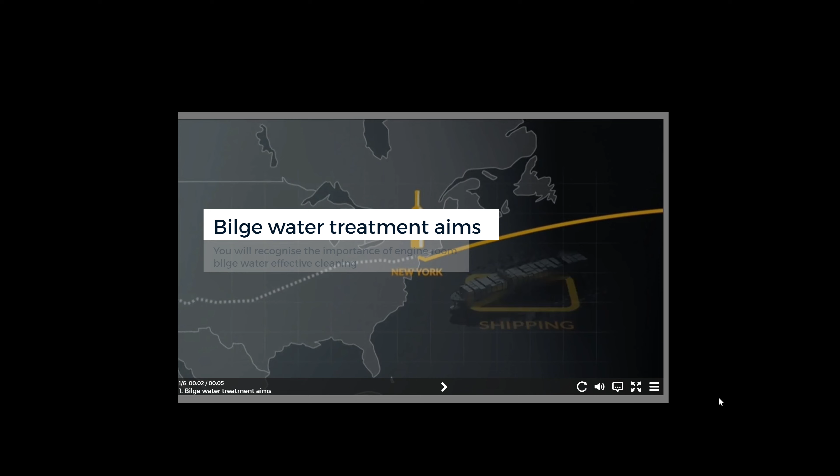Different modes of transport have a different impact on the environment. Carbon distance reflects the difference in climate impact among different modes of transport. For example, the wine industry recently found that a bottle of French wine transported by sea and served in a New York restaurant will have a lower carbon transportation footprint than a bottle of Californian wine served in that restaurant. Transporting goods by sea has a lower environmental impact than road, rail, or air transport.

As you've just noticed, shipping is the most carbon-efficient mode of transportation. Nevertheless, the environmental impact of shipping is not limited to greenhouse gases only. It also includes acoustic and oil pollution.

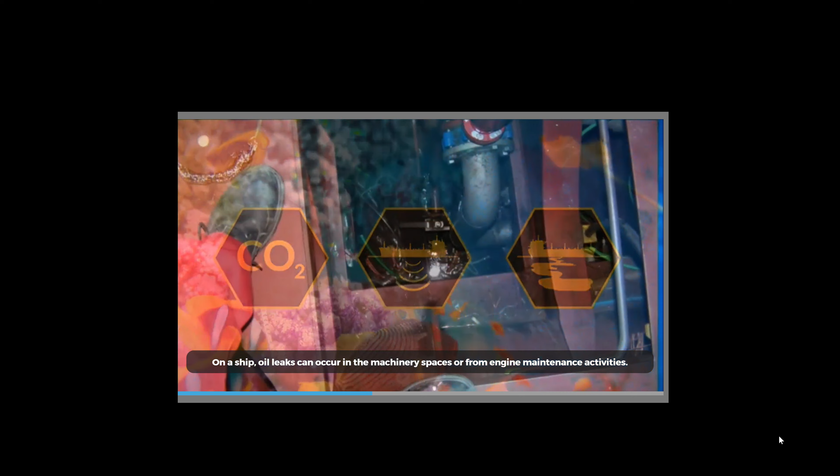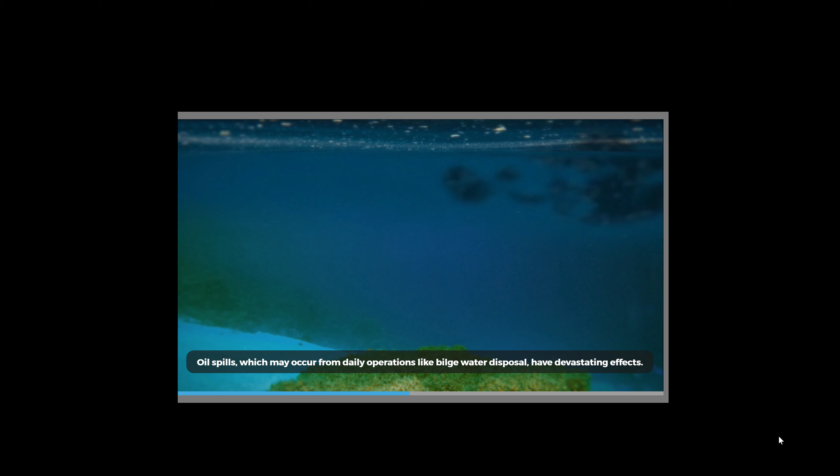On a ship, oil leaks can occur in the machinery spaces or from engine maintenance activities. Oil spills, which may occur from daily operations like bilge water disposal, have devastating effects. Oil and byproducts from the biological breakdown of oils can harm fish and wildlife and pose threats to human health if ingested.

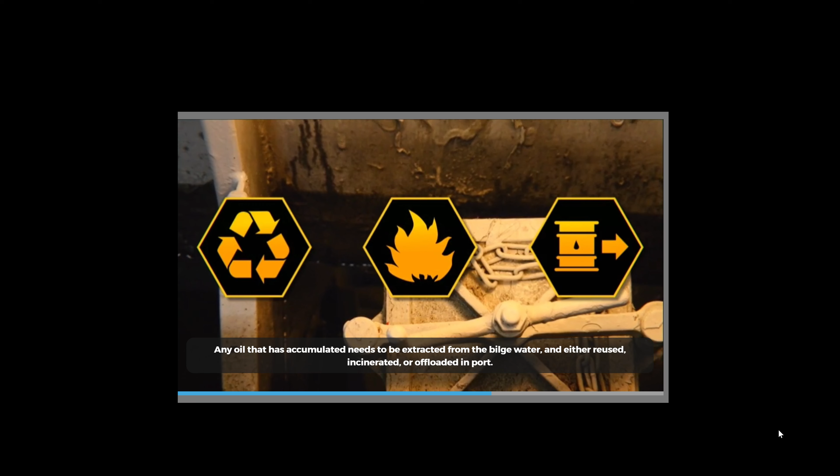Any oil that has accumulated needs to be extracted from the bilge water and either reused, incinerated, or offloaded in port. If the bilge water separator is faulty or is deliberately bypassed, untreated oily bilge water could be discharged directly into the ocean, where it can damage marine life. This will also cause ship operators to be given heavy fines and the crew can be sent to prison.

The size and global nature of the shipping industry, over 90% of all trade between countries is carried by ships, makes it important for the industry to continuously work to reduce its environmental impact. Cleaner oceans are a major environmental concern for the shipping industry.

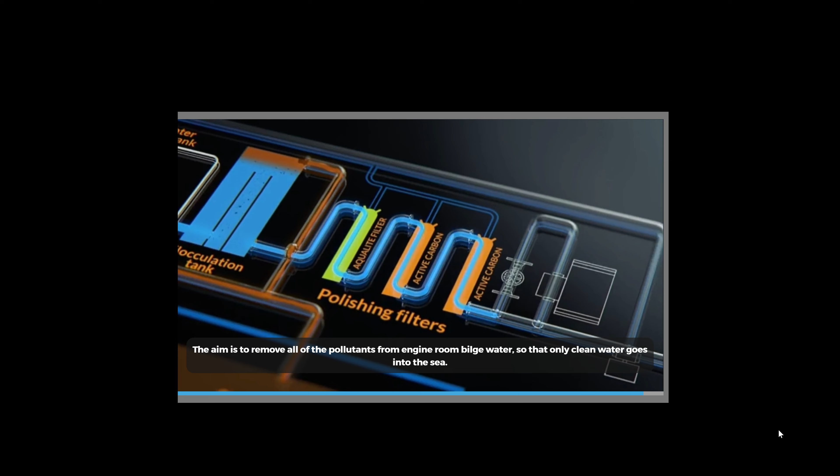The aim is to remove all of the pollutants from engine room bilge water, so that only clean water goes into the sea.

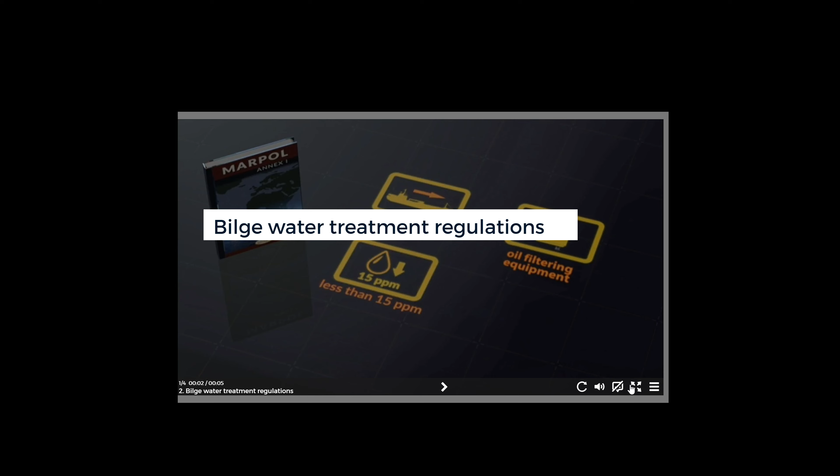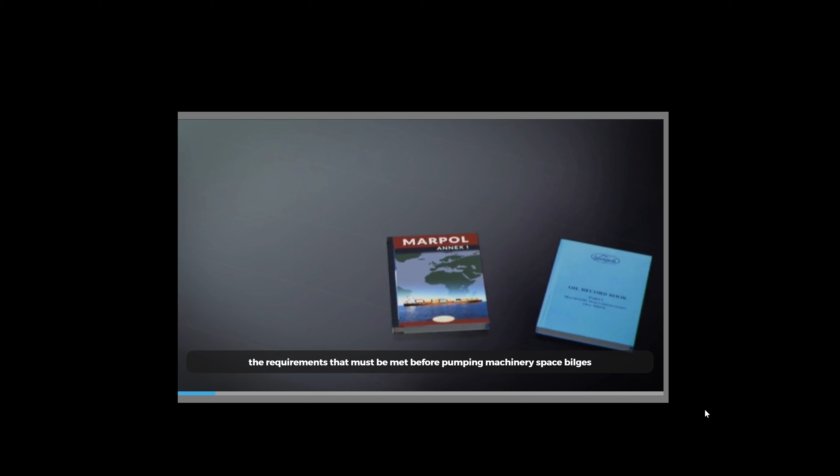To start with bilge water management, you need to know two things: the requirements that must be met before pumping machinery space bilges, and the records that must be completed for machinery space bilge discharges.

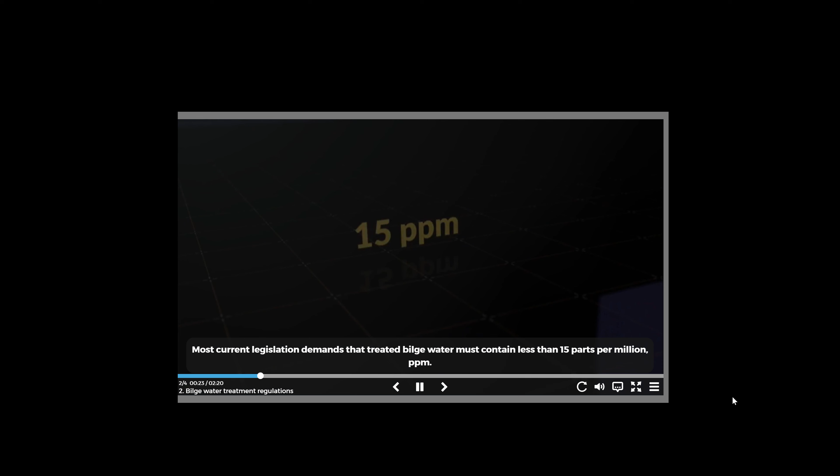Most current legislation demands that treated bilge water must contain less than 15 parts per million (ppm). To put that into context, if we had a typical 210-litre drum, 3.15 millilitres would be 15 ppm. That's about one medicine dropper or half a teaspoon of oil mixed in with a drum full of water. Depending on your point of view, that's either a lot or not very much. But remember, what we would like is zero discharge. When this rule first came in, 15 ppm was about the limit for what we could reasonably get down to, and what we could measure with reasonable accuracy.

Nowadays, however, most bilge separator manufacturers are working towards 5 ppm, which is already a requirement in some localized areas of the world.

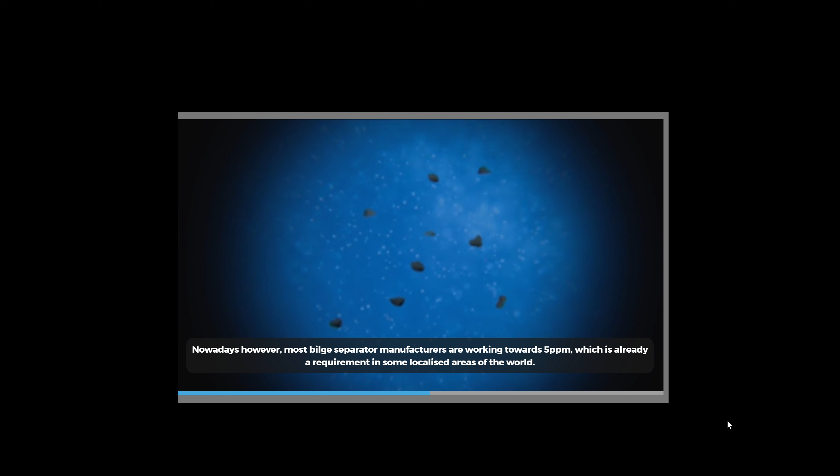First of all, we need to be clear that MARPOL regulations are written to try and avoid anyone cheating. So we must not knowingly put things like cargo washings or cargo pump room bilges into the engine room bilges and then say we are discharging engine room bilge water. That would be illegal.

Annex 1 of MARPOL says that for a vessel above 400 GRT, machinery space discharge outside a special area is allowed when the ship is proceeding en route. The oily mixture is processed through oil filtering equipment, meeting the requirements contained in Annex 1. The oil content of the effluent without dilution does not exceed 15 parts per million. The oily mixture does not originate from cargo pump room bilges on oil tankers. And the oily mixture, in case of oil tankers, is not mixed with oil cargo residues.

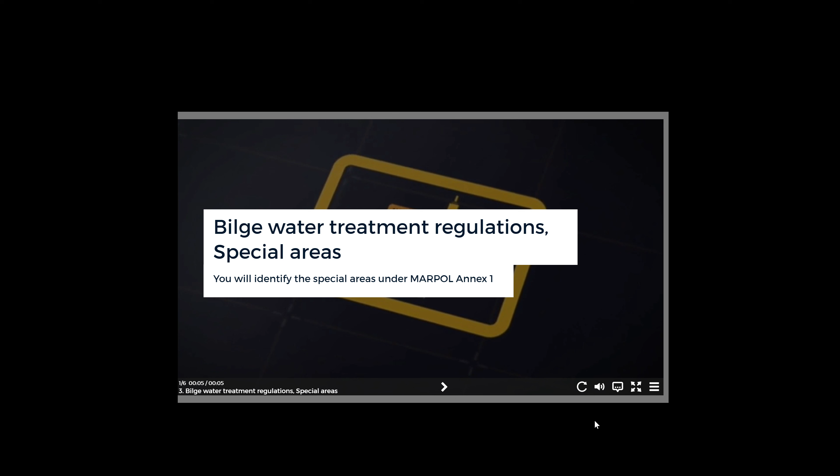We will talk about the special areas themselves in a moment, because some special areas are more special than others. However, in most special areas, the rules for discharging machinery space bilges are about the same as anywhere else. The difference lies with the requirements for the bilge water separator itself.

Essentially, if you are going to use a bilge water separator in a special area, then it must have an automatic alarm and stopping device.

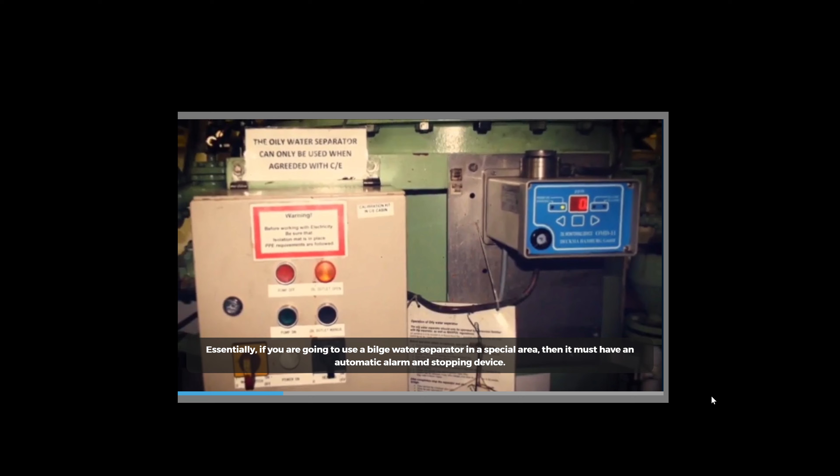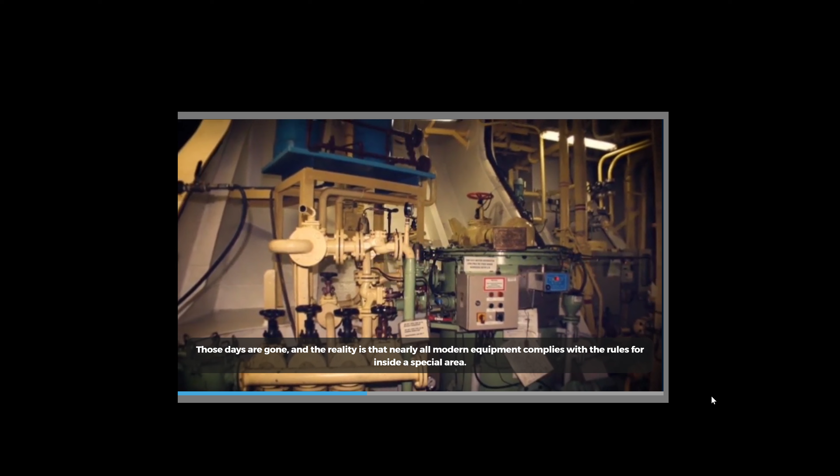We are going to try and stick with the things you need to know from an operational point of view. The difference between being outside or inside special areas was far greater many years ago, when there was a higher ppm allowance for machinery space bilges outside a special area. Those days are gone, and the reality is that nearly all modern equipment complies with the rules for inside a special area. However, it is probably worth mentioning that there is still a very big difference between inside and outside a special area when it comes to discharges from cargo operations. The supplement to the International Oil Pollution Prevention (IOPP) certificate, issued and checked annually, will tell you, the operator, what system is on board, and therefore how you can discharge the machinery space bilges.

The IMO also lists particularly sensitive sea areas, PSSAs. A PSSA is an area that needs special protection through action by IMO because of its significance for recognized ecological, socio-economic or scientific reasons, and which may be vulnerable to damage by international maritime activities.

Please remember that local regulations often apply, in places like the Great Barrier Reef, for example, and that new special areas are being added to different annexes of MARPOL all the time. So always check that you have up-to-date local information.

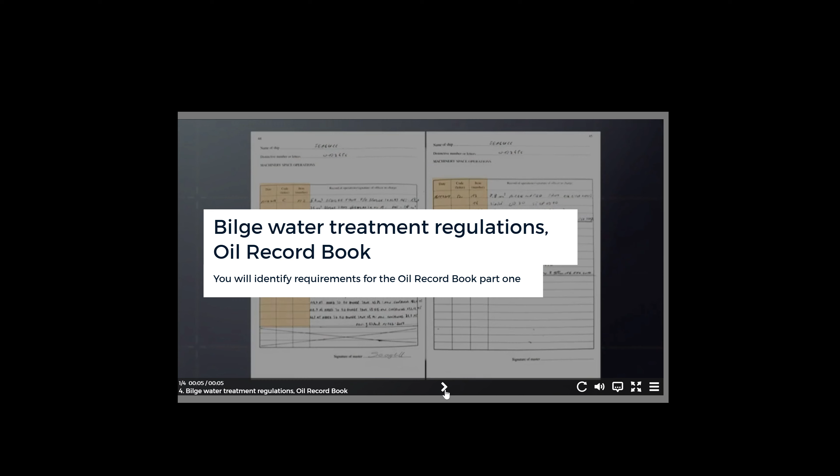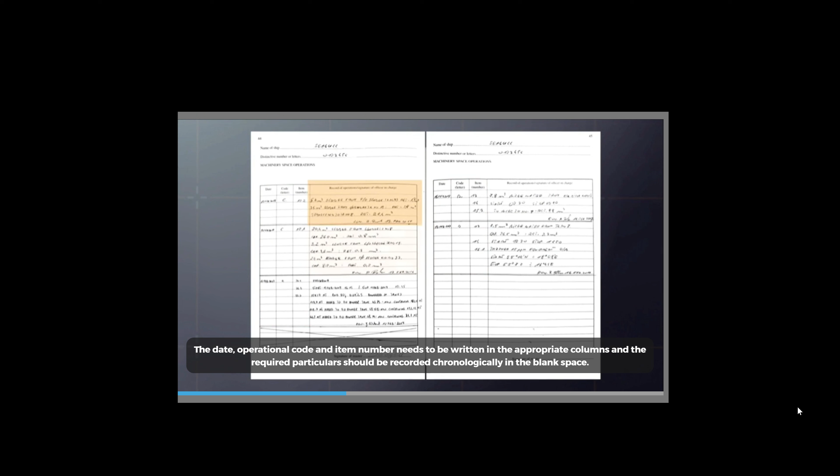The Oil Record Book, Part 1, must be accurately completed for every discharge from machinery space bilges. The date, operational code, and item number needs to be written in the appropriate columns, and the required particulars should be recorded chronologically in the blank space. For discharges overboard, the ship's position at the start and end of the discharge should be entered.

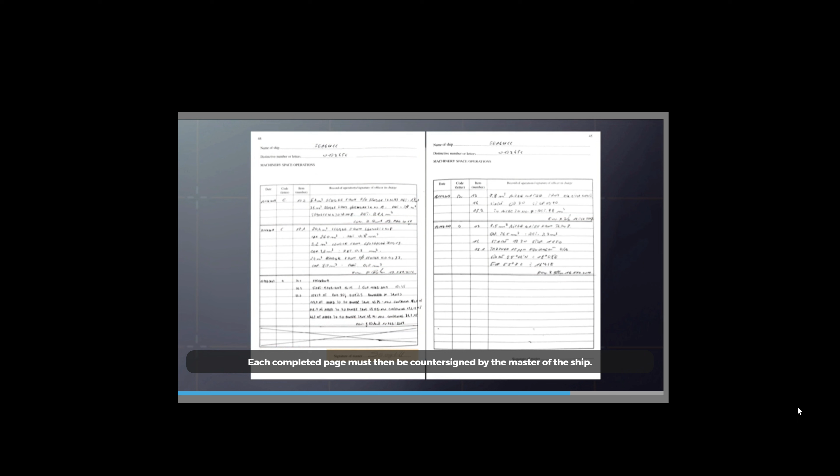Each completed operation shall be signed for and dated by the officer or officers in charge of the operation. Each completed page must then be countersigned by the master of the ship. Failure to fill in the oil record book in a proper way has led to those on board and companies being prosecuted.

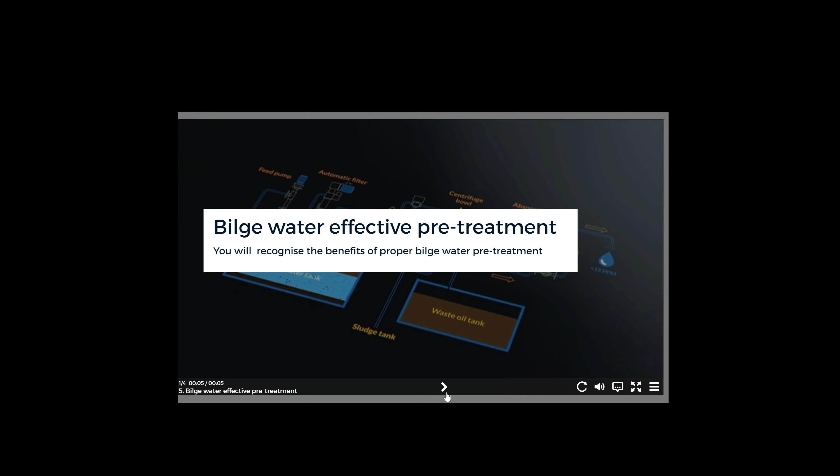In order to be approved for use on board ships, bilge water separators have to meet tight standards, set out in guidelines from the IMO and in type approvals from classification societies and regulatory bodies. These say that bilge separators should be capable of producing an effluent for discharge to the sea containing not more than 15 ppm of oil, irrespective of the oil content of the feed supplied to it, and that it must be capable of handling emulsions.

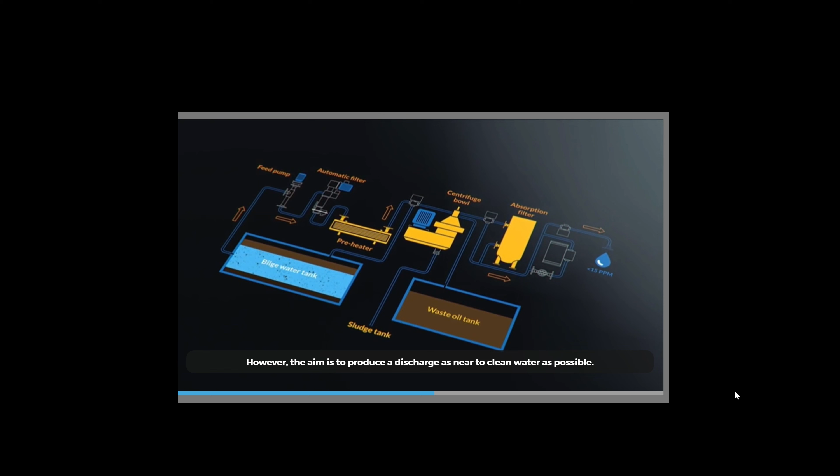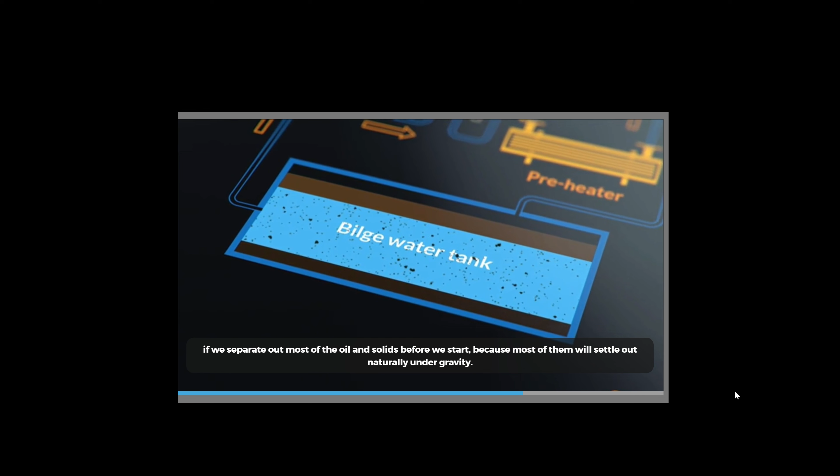However, the aim is to produce a discharge as near to clean water as possible. We can help the separator to do this and reduce the maintenance required on the separator if we separate out most of the oil and solids before we start, because most of them will settle out naturally under gravity.

Solve this riddle. What might bilge water, mayonnaise and hand cream have in common? Emulsion.

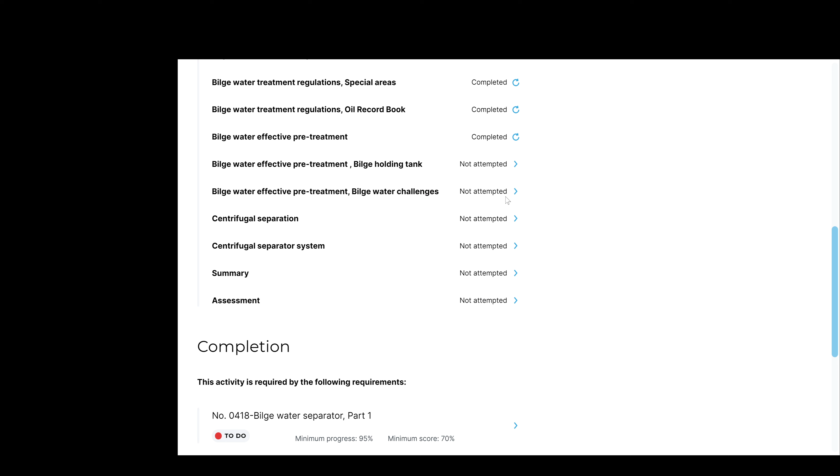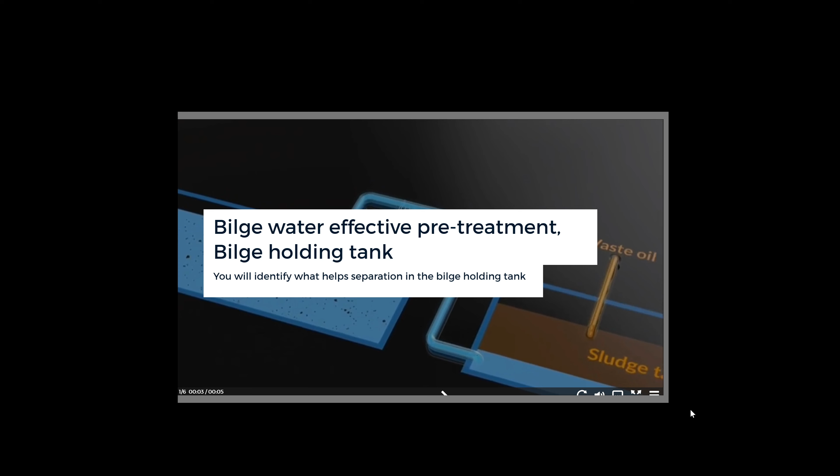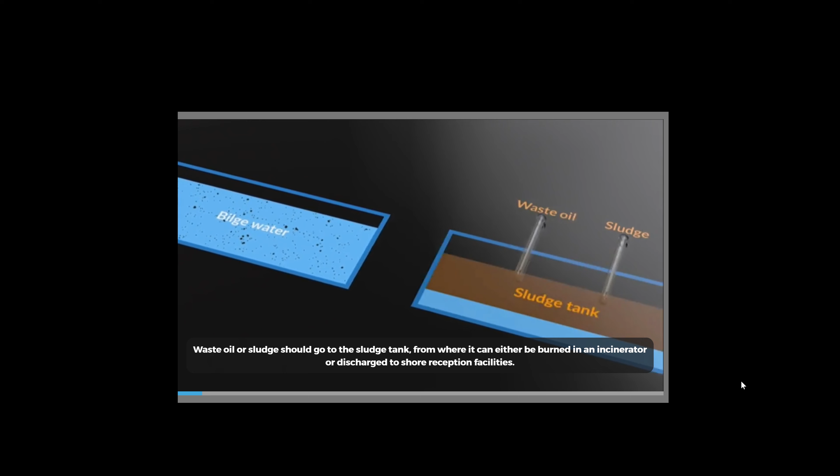First of all, the bilge holding tank is for bilge water. Waste oil or sludge should go to the sludge tank, from where it can either be burned in an incinerator or discharged to shore reception facilities.

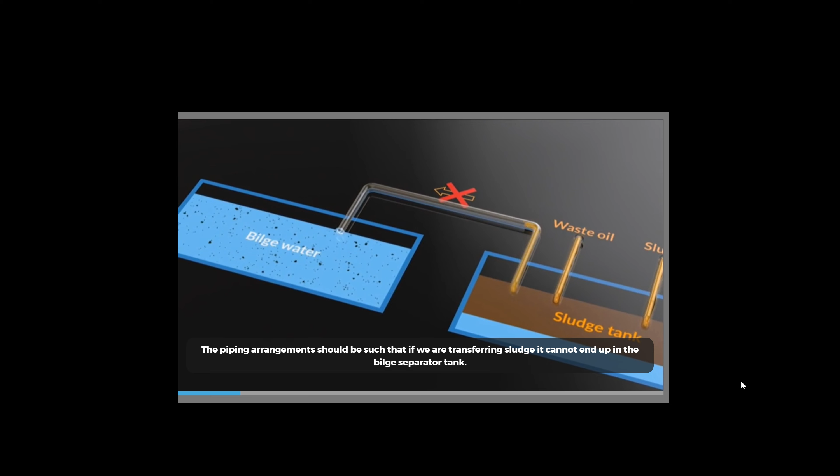The piping arrangements should be such that if we are transferring sludge, it cannot end up in the bilge separator tank. There may be some provision to strip water from the bottom of the sludge tank to the bilge tank, but this must be via an open hopper or sight glass, so that we can see that it is actually water.

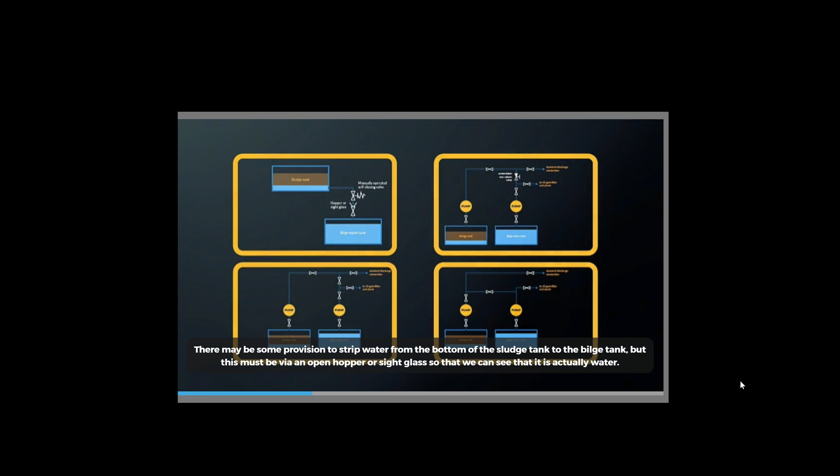MARPOL specifies which arrangements are acceptable and which are not. Here are just a few examples.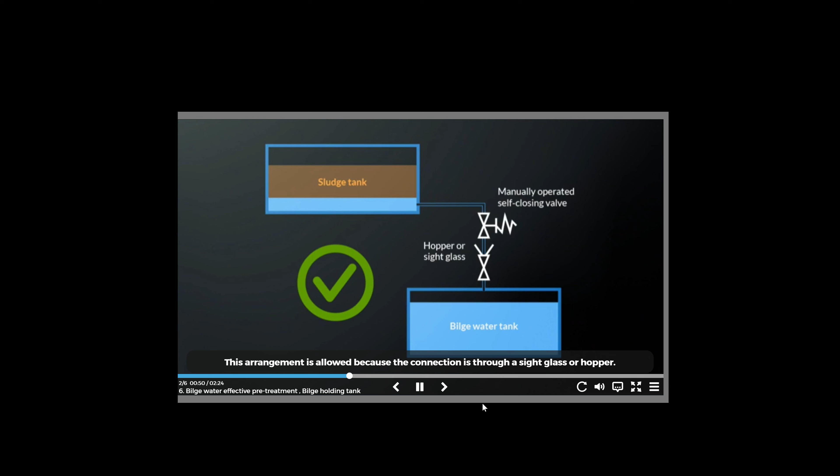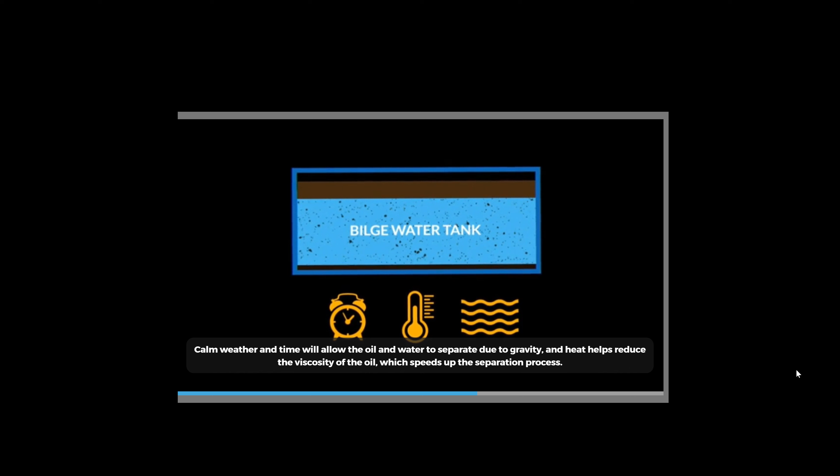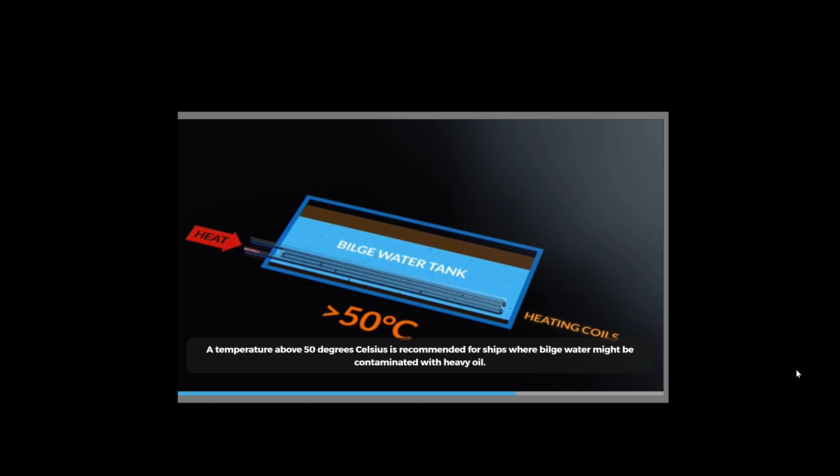Separation in the bilge holding tank can be helped by time, heat and calm seas. Calm weather and time will allow the oil and water to separate due to gravity, and heat helps reduce the viscosity of the oil, which speeds up the separation process. A temperature above 50 degrees Celsius is recommended for ships where bilge water might be contaminated with heavy oil. The suction pipe for the bilge separator should be above the heating coils to avoid sucking sediments from the bilge tank and sending them to the bilge separator.

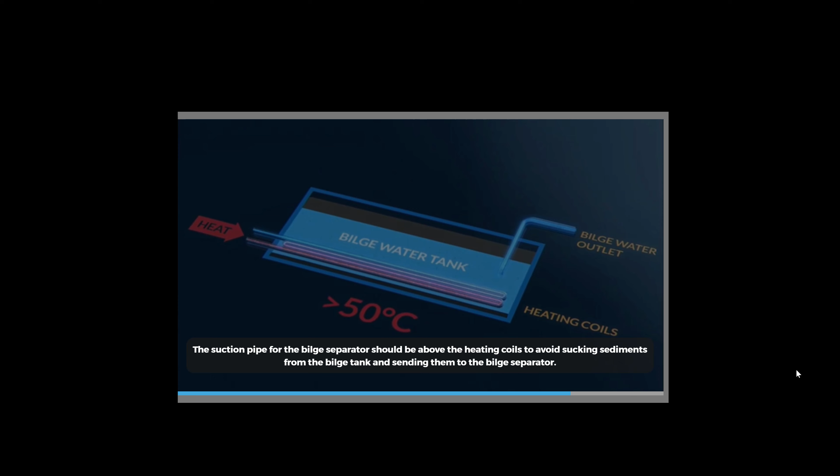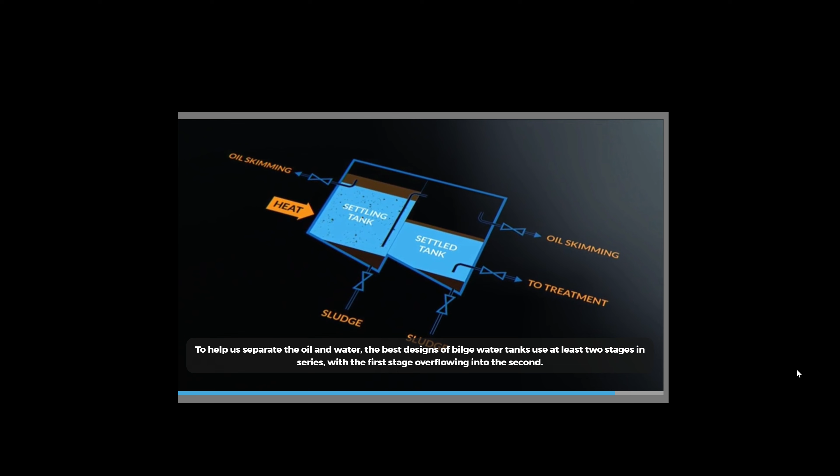To help us separate the oil and water, the best designs of bilge water tanks use at least two stages in series, with the first stage overflowing into the second. We will be able to skim oil off from above the surface of the water and also drain sludge and solids from the bottom of the tanks.

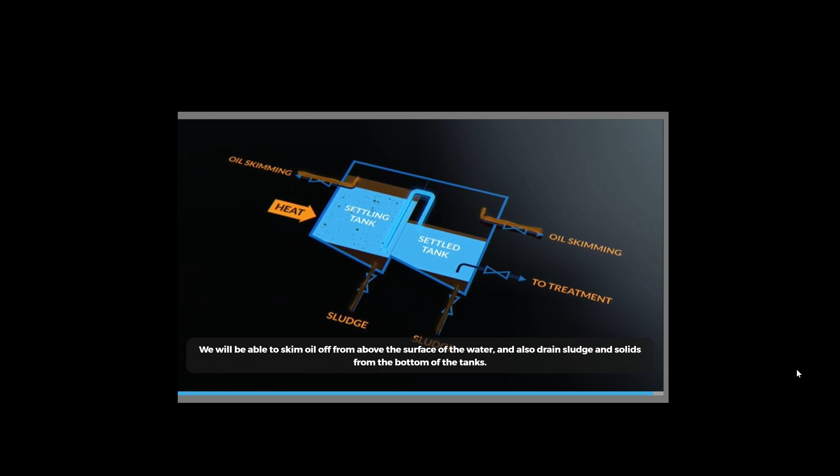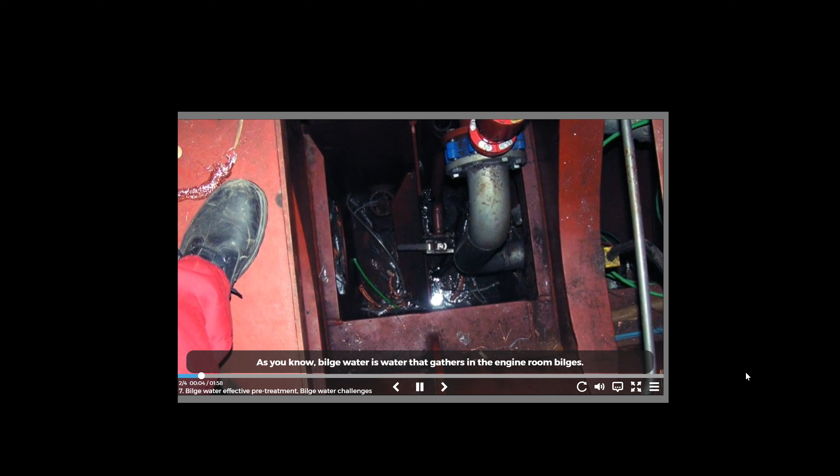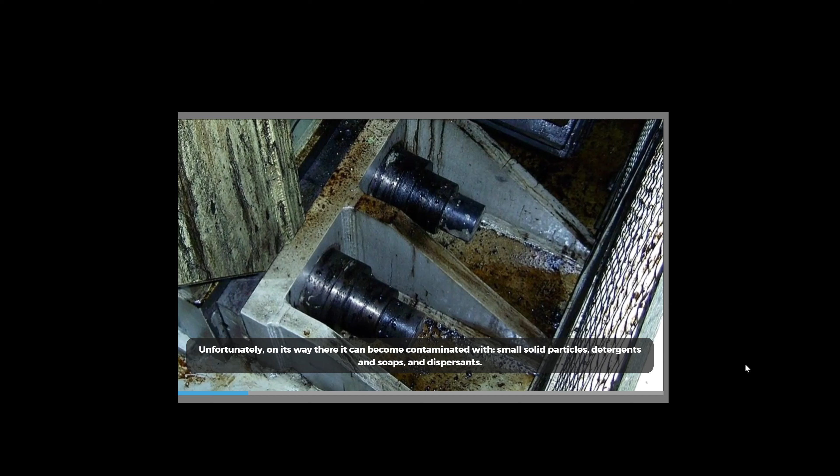As you know, bilge water is water that gathers in the engine room bilges. Unfortunately, on its way there it can become contaminated with small solid particles, detergents and soaps, and dispersants. All of these increase the difficulty of having totally clean water at the outlet from the bilge water separator. The formation of stable emulsions in bilge water creates a particularly difficult situation for the bilge water separator to deal with, since it is harder to separate the water from the small droplets of oil in a stable emulsion.

An oil dispersant is a mixture of emulsifiers and solvents that helps break oil into small droplets. Dispersants are often used deliberately following an oil spill. Dispersants are also a constituent within fuel oil additives and lubricating oil additives.

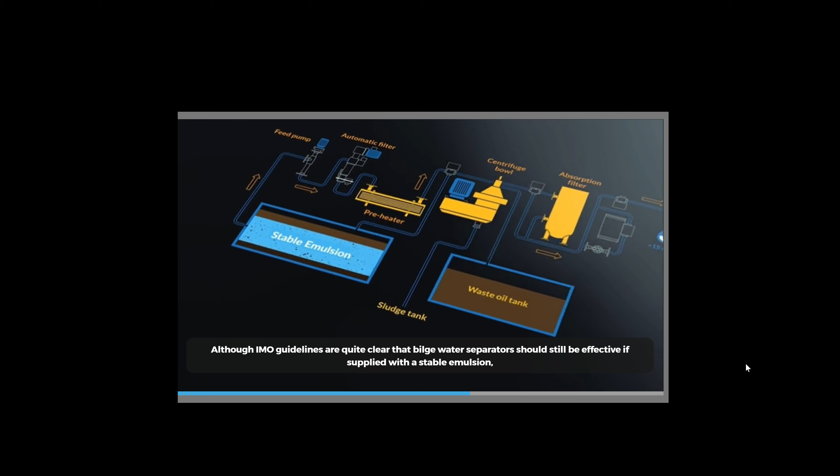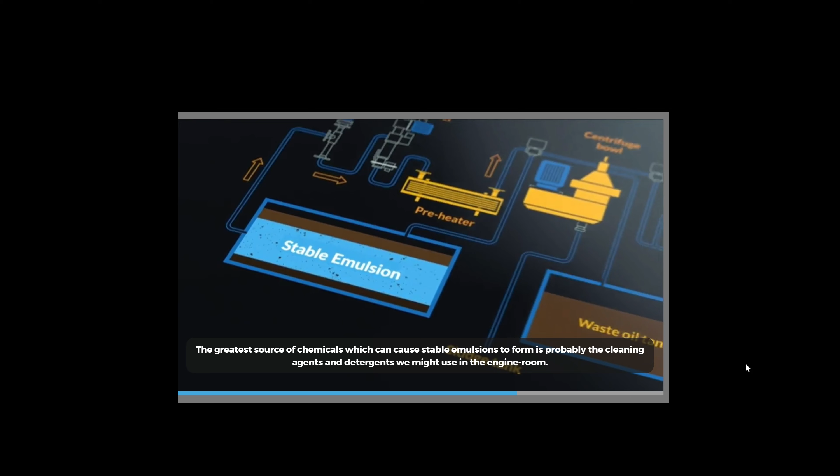Although IMO guidelines are quite clear that bilge water separators should still be effective if supplied with a stable emulsion, we will get improved separation if we can avoid forming emulsions in the first place. The greatest source of chemicals which can cause stable emulsions to form is probably the cleaning agents and detergents we might use in the engine room.

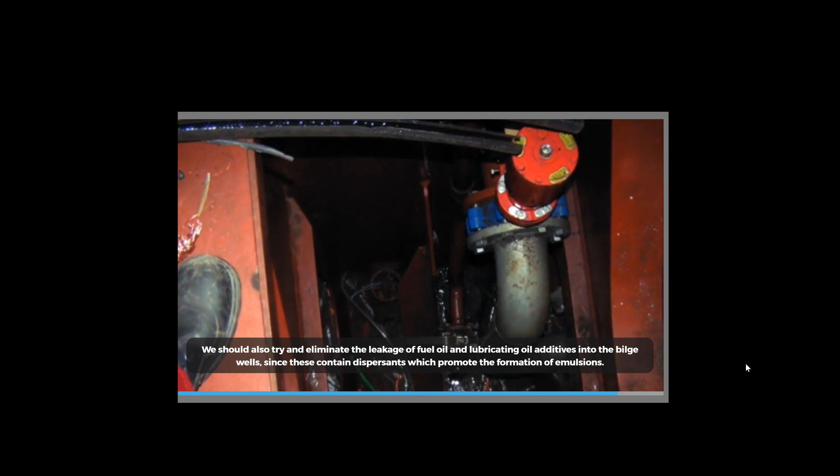We should be using cleaning agents that are listed as being quick separating, environmentally friendly, and non-toxic. Some suppliers will specify that their products are compatible for use with bilge separators. We should also try and eliminate the leakage of fuel oil and lubricating oil additives into the bilge wells, since these contain dispersants which promote the formation of emulsions.

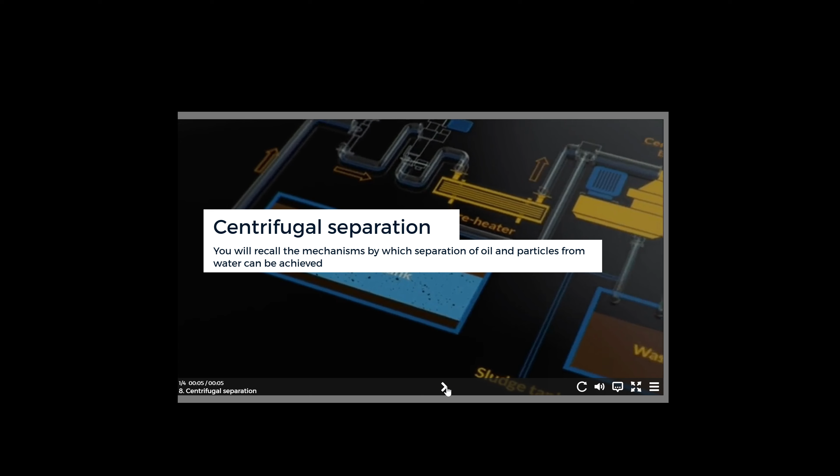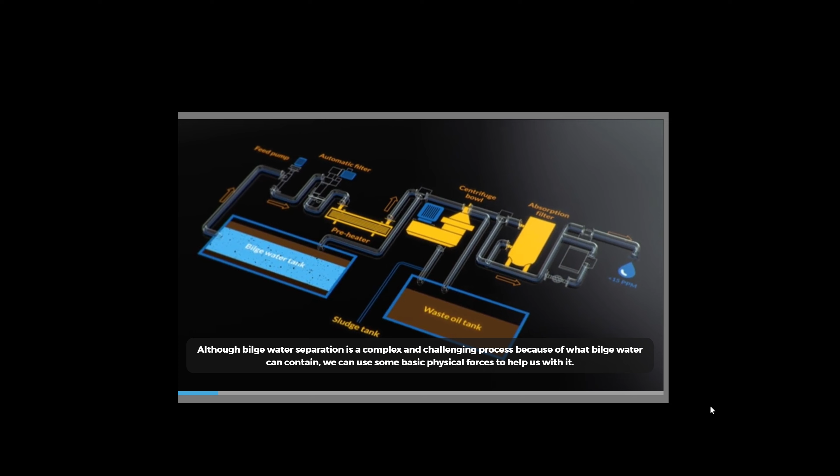Although bilge water separation is a complex and challenging process because of what bilge water can contain, we can use some basic physical forces to help us with it. This learning unit is to remind you of the mechanisms by which separation of oil and particles from water can be achieved. This will help you to understand better how different types of separators work.

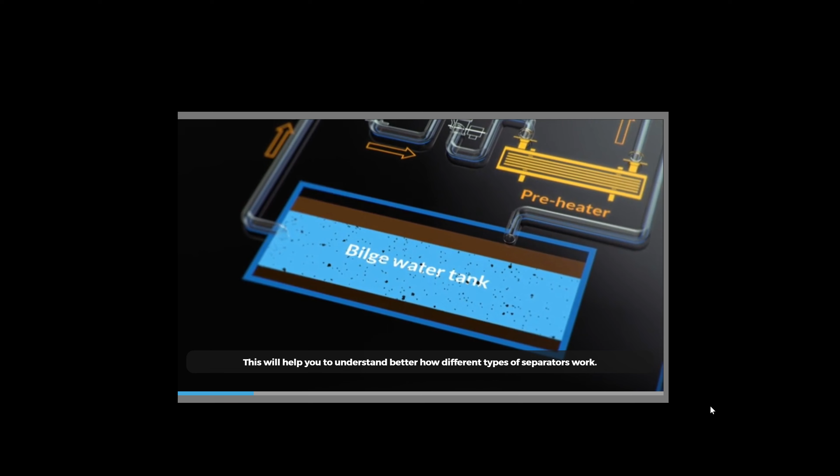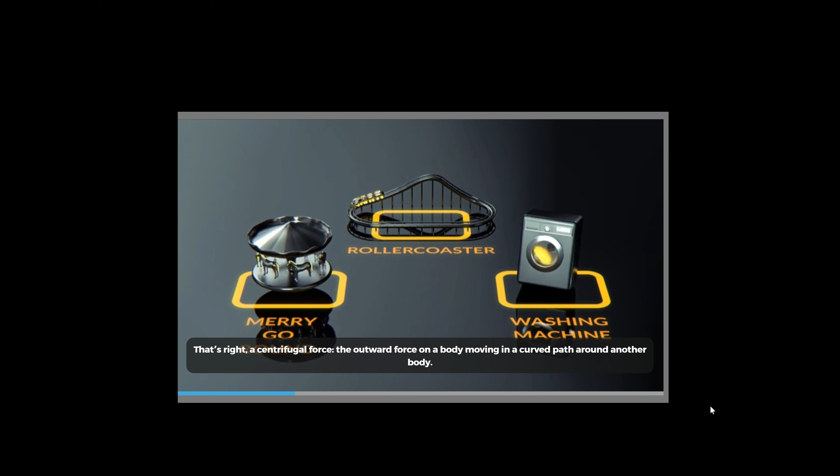Do you know which force is present on a merry-go-round, a roller coaster, and a washing machine? That's right, a centrifugal force - the outward force on a body moving in a curved path around another body.

Although the ways in which various bilge separators work get put into separate categories, in reality, some of the same processes go on to varying degrees in most types of separators.

Coalescence. When particles or oil droplets coalesce, it means that they come together. So for instance, several small oil droplets come together and form one larger droplet. It is then much easier to separate a large oil droplet or a large dirt particle from water.

Flocculation. Flocculation is a process by which two or more particles aggregate, stick together, without losing their individual boundaries. A high alkaline pH value promotes flocculation, which is why separators that rely mainly on flocculation often use chemical dosing to raise the pH.

Gravity. Nearly all bilge water separators use gravity separation at some point in the bilge water treatment process, even if it is in the bilge tank. Heavy particles, sludge and dirt, sink to the bottom, whilst lighter fractions, oil and scum, float to the top.

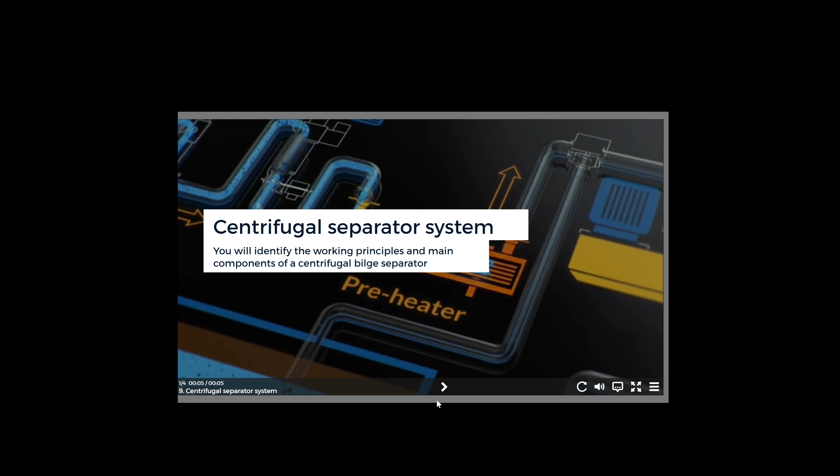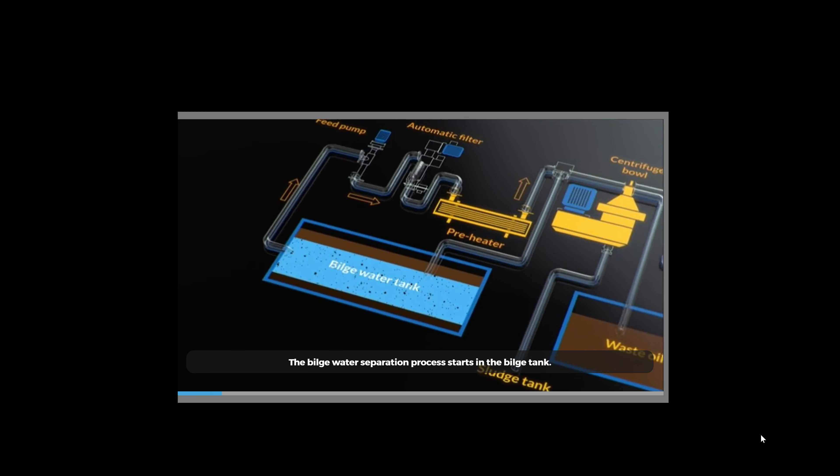Let's take a closer look at a typical centrifugal separator system. The bilge water separation process starts in the bilge tank. A variable rate feed pump supplies bilge water from the bilge tank to the separator via an automatic filter.

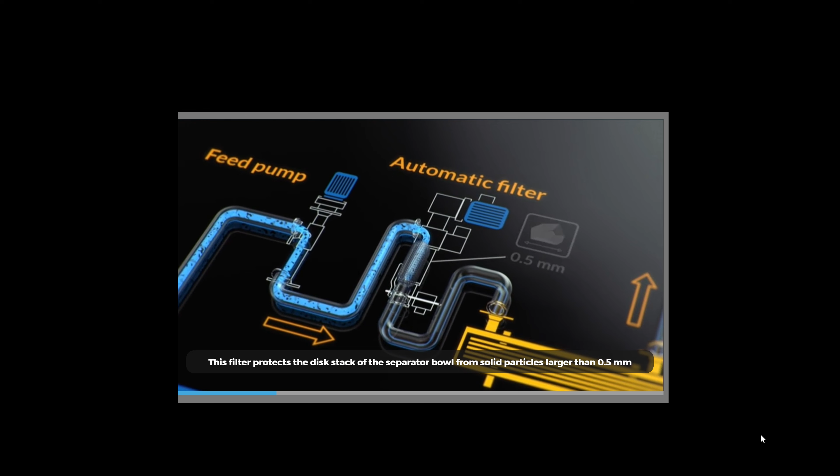This filter protects the disc stack of the separator bowl from solid particles larger than 0.5 mm. A differential pressure switch controls the cleaning of the automatic filter, and the rate of the feed pump is controlled by the oil in water monitor.

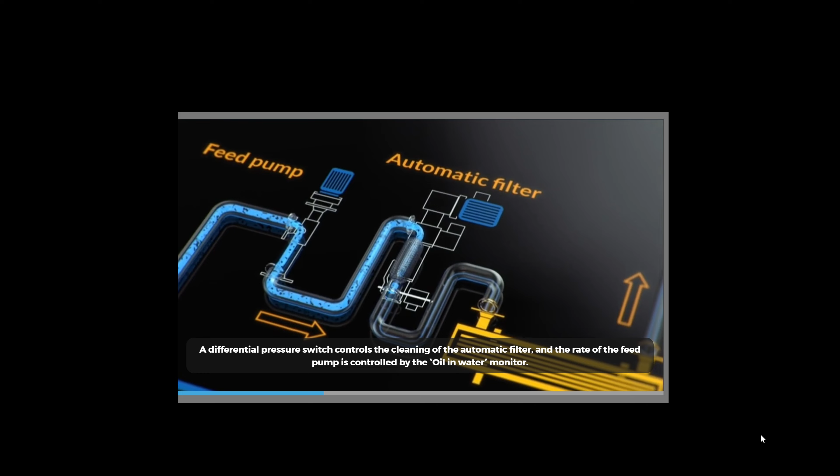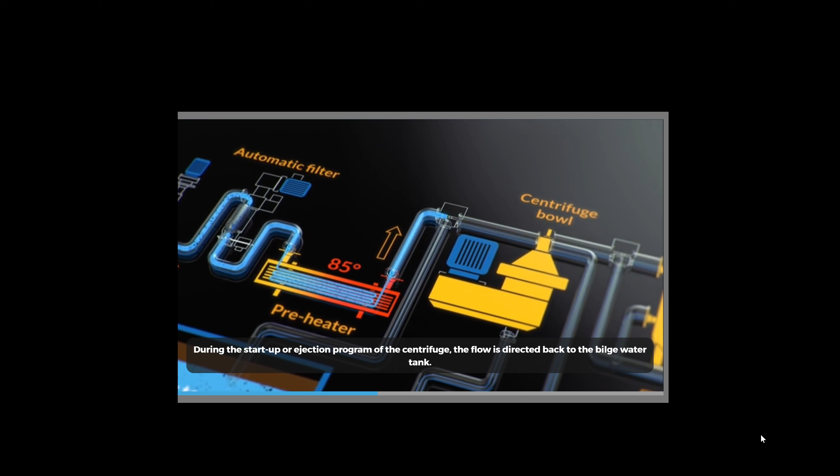The bilge water then goes through a preheater, where it is heated to about 85 degrees Celsius, and via the feed valve to the separator. During the startup or ejection program of the centrifuge, the flow is directed back to the bilge water tank.

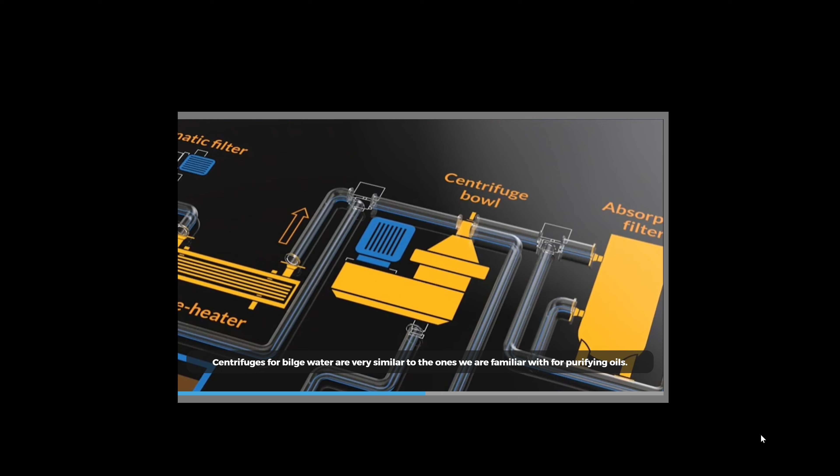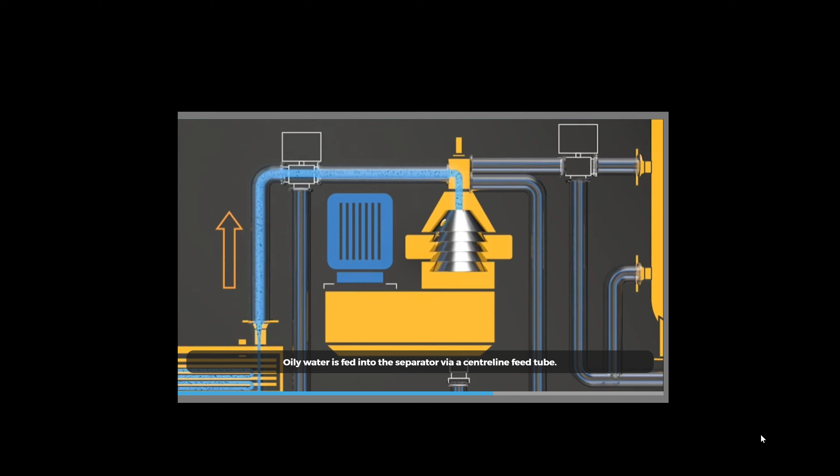Centrifuges for bilge water are very similar to the ones we are familiar with for purifying oils. A disc stack is placed inside the bowl to create a laminar flow and improve the separation effect. Oily water is fed into the separator via a centerline feed tube. There are two outlets from the separator, one for oil and one for water.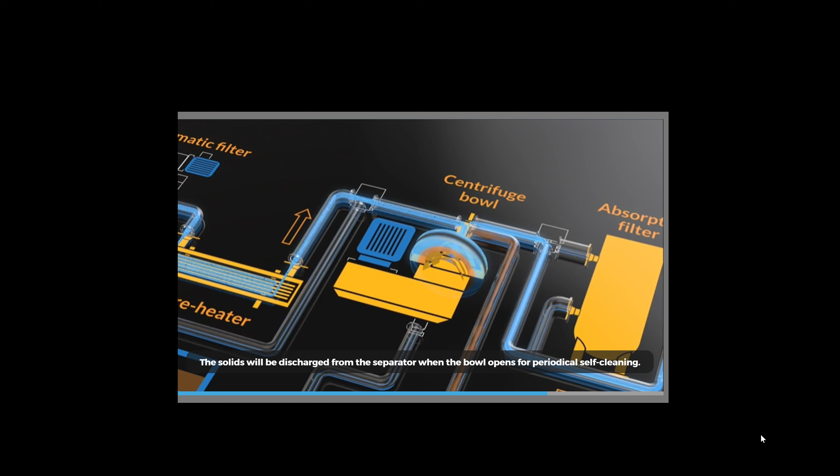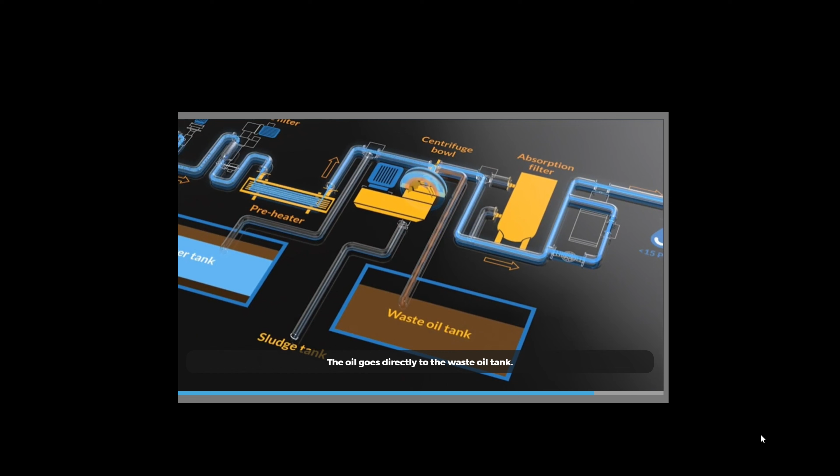The solids will be discharged from the separator when the bowl opens for periodical self-cleaning. The purified water goes to the oil monitoring equipment before being discharged overboard. The oil goes directly to the waste oil tank. The solids go directly to a sludge tank.

In some systems, an absorption type filter may be fitted after the separator. When used, this enables the oil content to be further lowered to below 5 ppm.

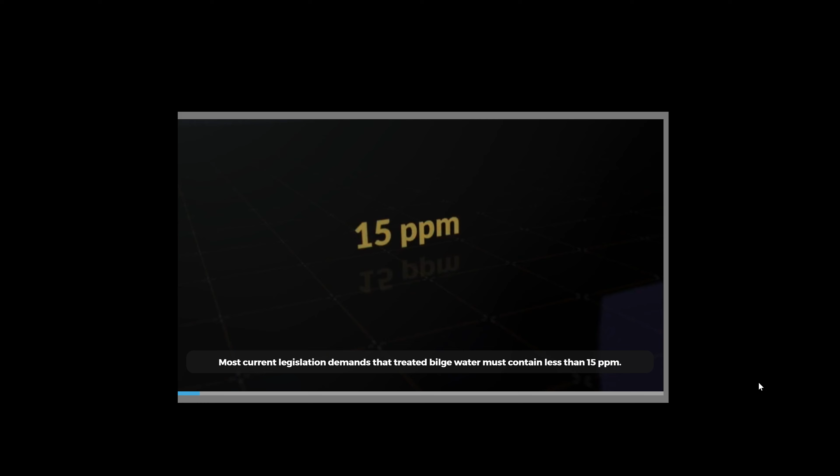Most current legislation demands that treated bilge water must contain less than 15 ppm. Nowadays, however, most bilge separator manufacturers are working towards 5 ppm, which is already a requirement in some localized areas of the world.

Annex 1 of MARPOL says that for a vessel above 400 GRT, machinery space discharge outside a special area is allowed when the ship is proceeding en route.

The oily mixture is processed through oil filtering equipment, meeting the requirements contained in Annex 1. The oil content of the effluent without dilution does not exceed 15 parts per million. The oily mixture does not originate from cargo pump room bilges on oil tankers, and the oily mixture, in case of oil tankers, is not mixed with oil cargo residues.

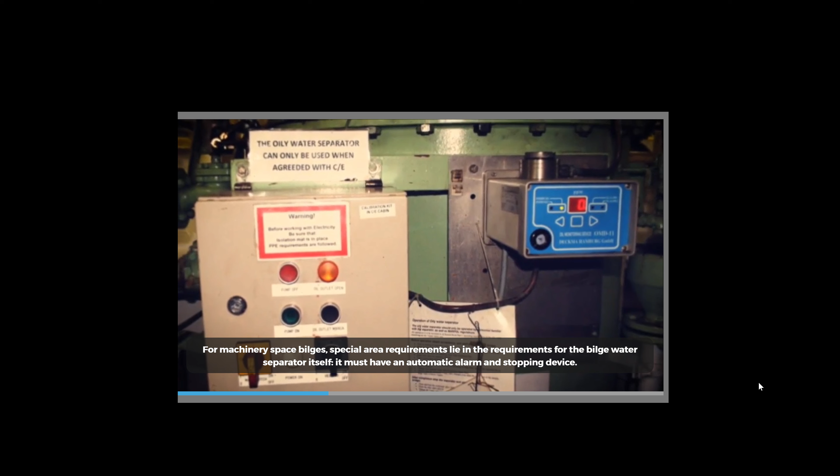For machinery space bilges, special area requirements lie in the requirements for the bilge water separator itself. It must have an automatic alarm and stopping device. All the details of the requirements for pollution prevention equipment are included in IMO's MEPC.107(49) document.

Special areas are listed in MARPOL Annex 1. Local regulations often apply in places like the Great Barrier Reef, for example, and new special areas are being added to different annexes of MARPOL all the time. The IMO also lists particularly sensitive sea areas which need special protection because of their significance for mankind.

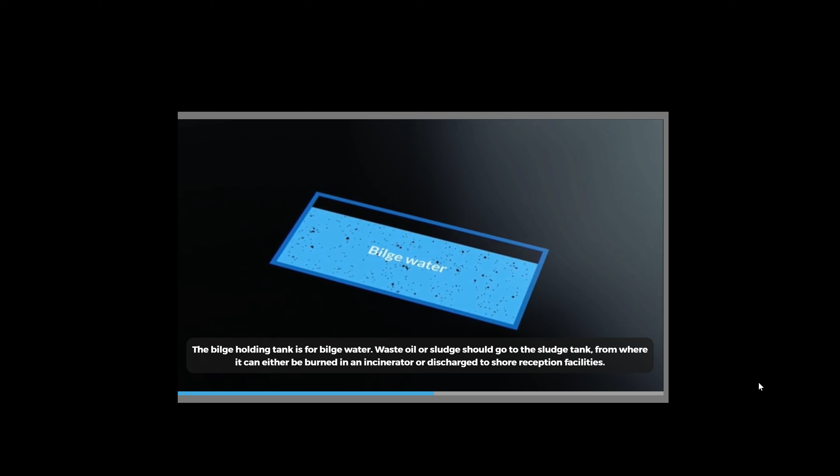The bilge holding tank is for bilge water. Waste oil or sludge should go to the sludge tank, from where it can either be burned in an incinerator or discharged to shore reception facilities. MARPOL specifies which arrangements are acceptable and which are not.

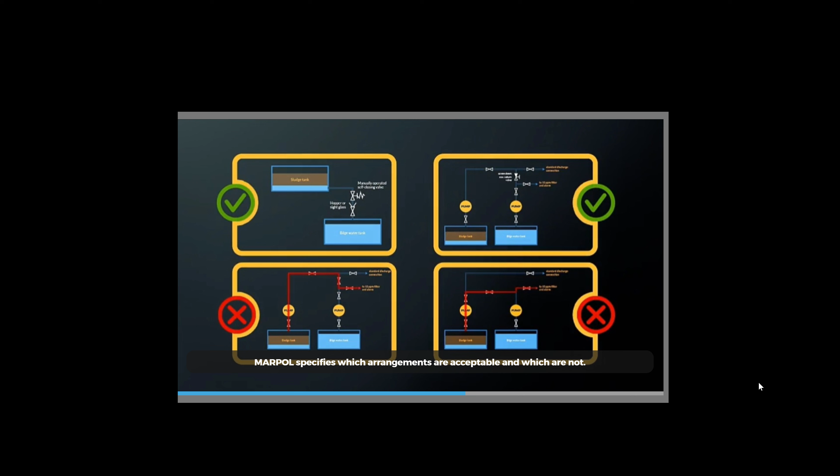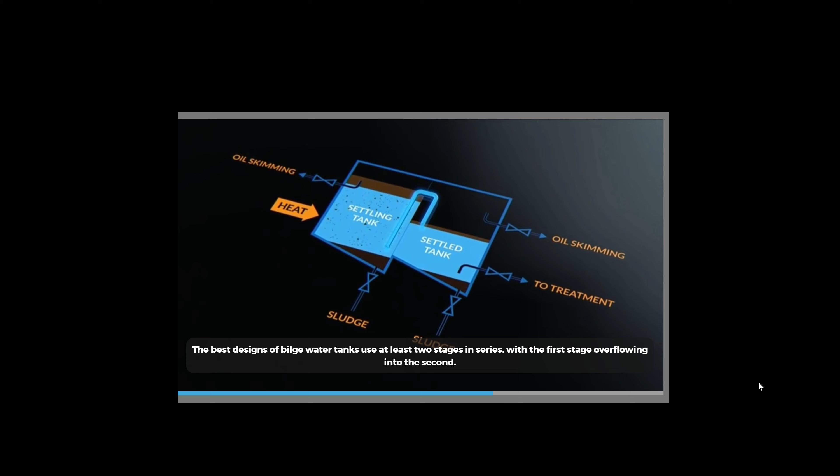The best designs of bilge water tanks use at least 2 stages in series, with the first stage overflowing into the second. Small solid particles, detergents and soaps and dispersants make the job of the separator more difficult.

Avoid the use of cleaning products that create stable emulsions. We should choose quick separating environmentally friendly cleaners. And any leakage of fuel oil and lubricating oil additives into the bilge wells should be eliminated.

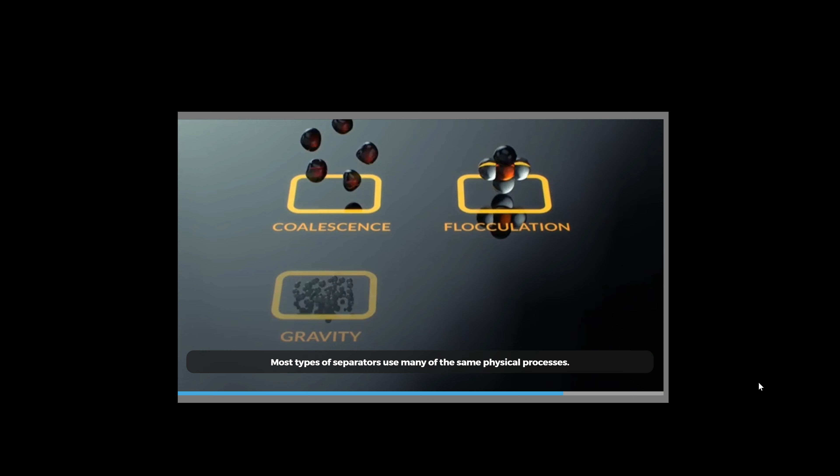Most types of separators use many of the same physical processes. Coalescence is when several small oil droplets come together and form one larger droplet. Flocculation is when 2 or more particles aggregate, stick together, without losing their individual boundaries.

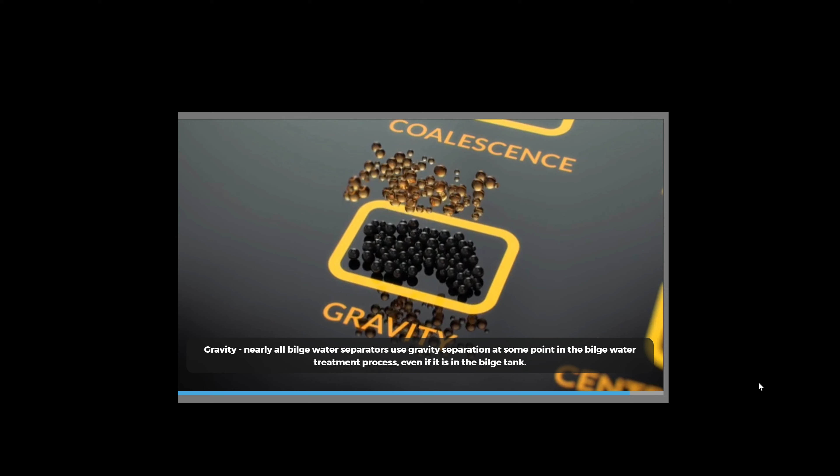Gravity. Nearly all bilge water separators use gravity separation at some point in the bilge water treatment process, even if it is in the bilge tank. In centrifugal separators, we are replacing the force of gravity with a much higher centrifugal force.